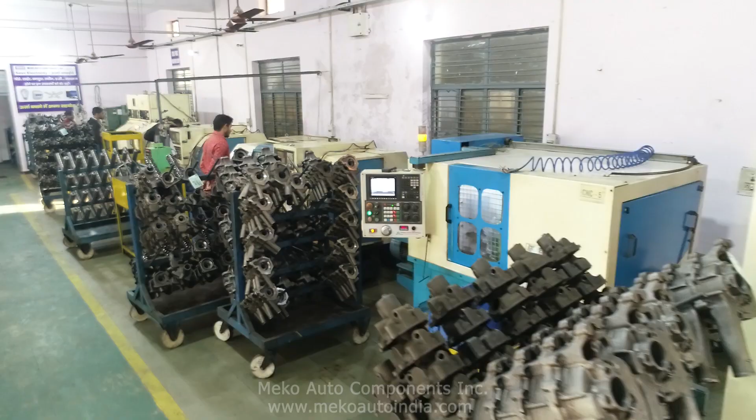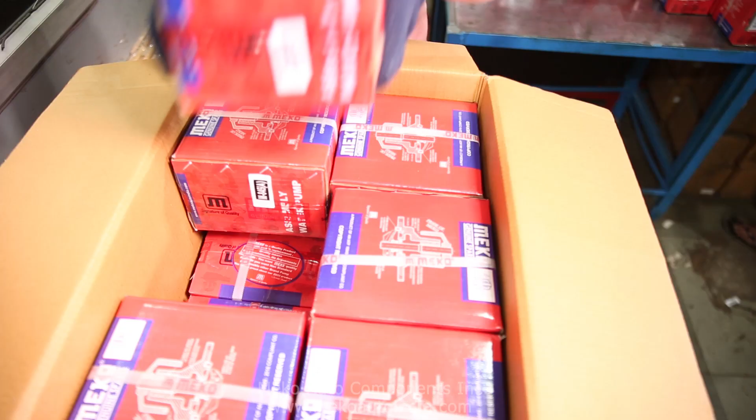With a production capacity of 30,000 pumps a month, we manufacture, supply and export around 300 variants of automotive water pump assemblies, kits and spares for all kinds of vehicles such as heavy commercial vehicles, light commercial vehicles, earth movers, stationary engines, jeeps, cars and tractors for both Indian and overseas markets such as Sri Lanka, Bangladesh, South Africa, USA, UK, Germany, Belgium, Netherlands, Poland, Australia, etc. through an extensive global network of around 300 distributors, our trustworthy and reliable business partners.

We are currently supplying to OEMs such as Field Marshal, PM Diesel Private Limited and Marshall Motors, Sonalika Tractors, Captain Tractors Private Limited, Adico Escorts Agri Equipments Private Limited and Ace Crane. And our prospective esteemed customers are JBM Group, GMB USA, Agco International GmbH, etc.

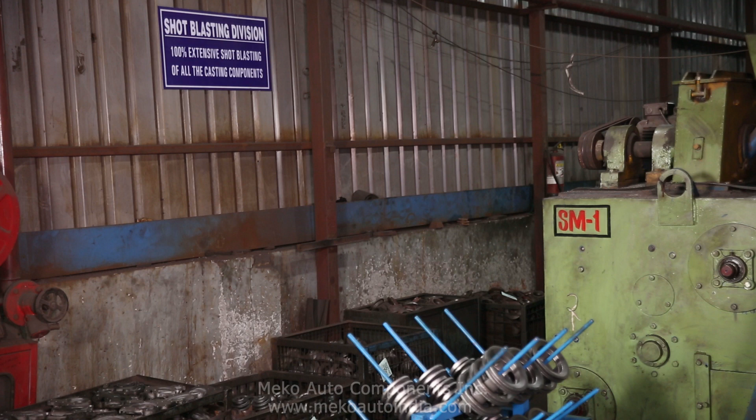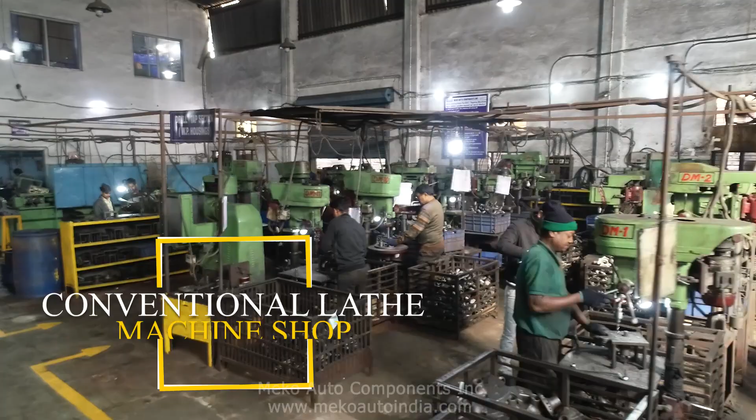After the initial process of grinding and fettling, all the casting components are extensively shot blasted before they are delivered to the conventional lathe machine shop, equipped with calibrated gauges and fixtures for controlled and accurate proof machining by highly skilled and experienced machine operators.

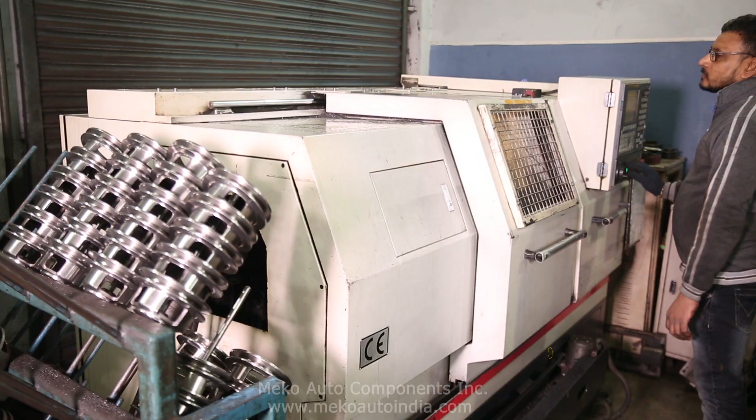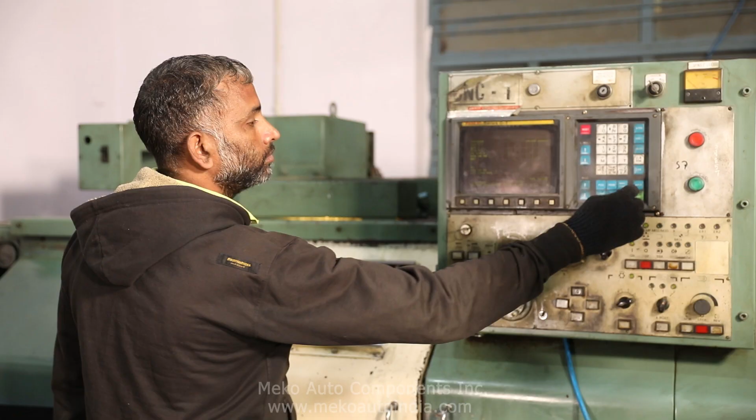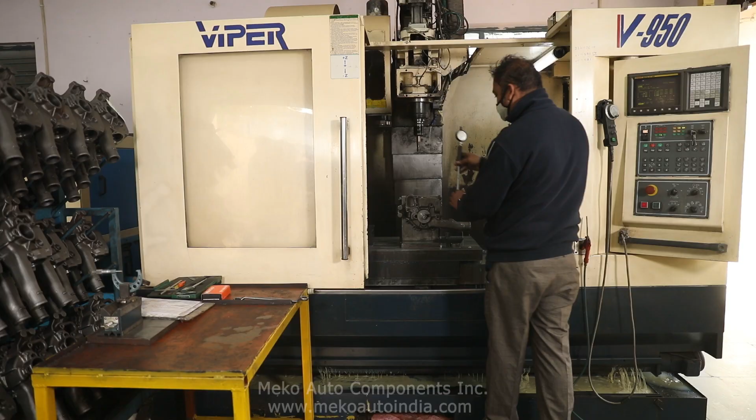All the proof machined casting components are precision machined in our state-of-the-art CNC or VMC machine shop, equipped with all the standard inspection instruments, gauges and fixtures under the supervision of qualified and trained quality inspectors. We also have an in-house injection molding setup for the production of high-performance industrial plastic PPS impellers.

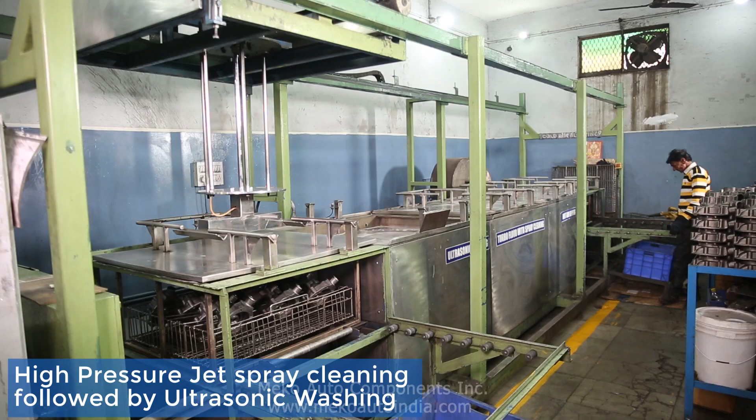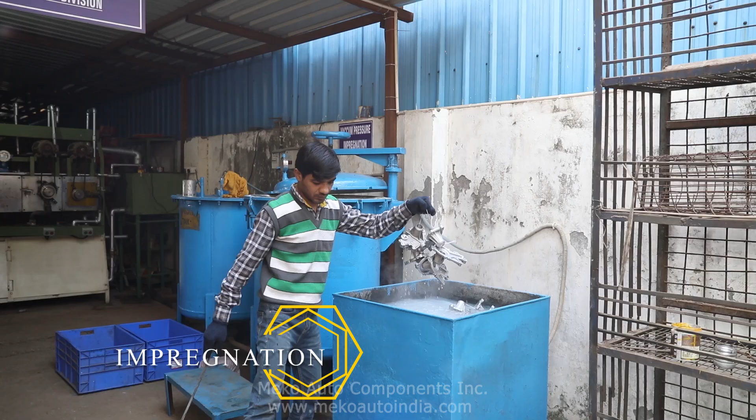For a thorough and complete removal of the tenacious contaminants and dust particles, all the final machined components are comprehensively cleaned and washed in the in-house automated multi-stage ultrasonic cleaning system before they are forwarded to the assembling shop. All the aluminum machined housings are impregnated as per set standards. Apart from this, our important components are procured from some of the top OEM suppliers and certified vendors.

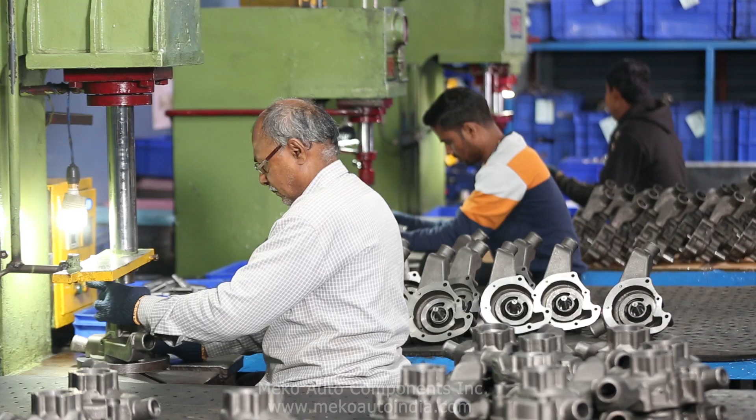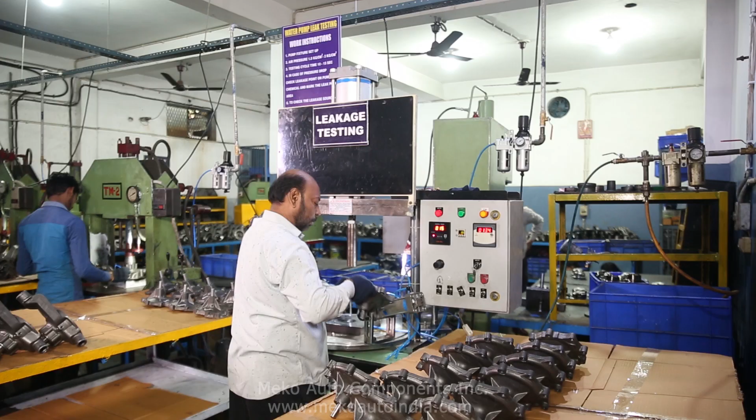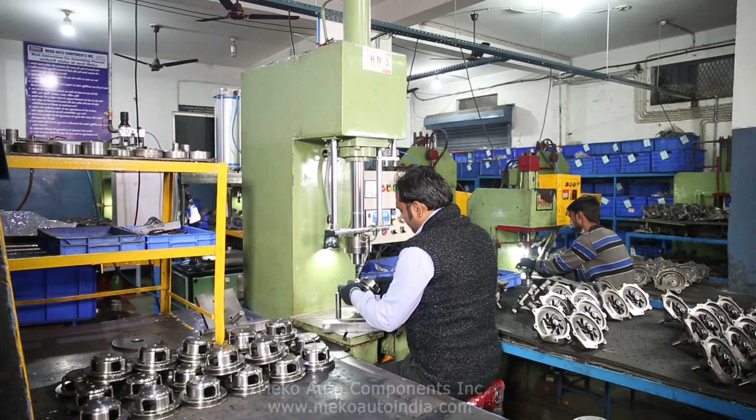Our water pump assembly shop is equipped with modern hydraulic presses with load cells for accurate and controlled water pump assembling with the aid of calibrated assembling fixtures and gauges. All the water pump housings semi-assembled with bearing and mechanical seal are leak tested on special purpose testing machines using pneumatic pressure decay method and bubble immersion method with the aid of test fixtures at standard air pressure. All the mechanical seals are also leak tested using the same process at the pre-assembly stage.

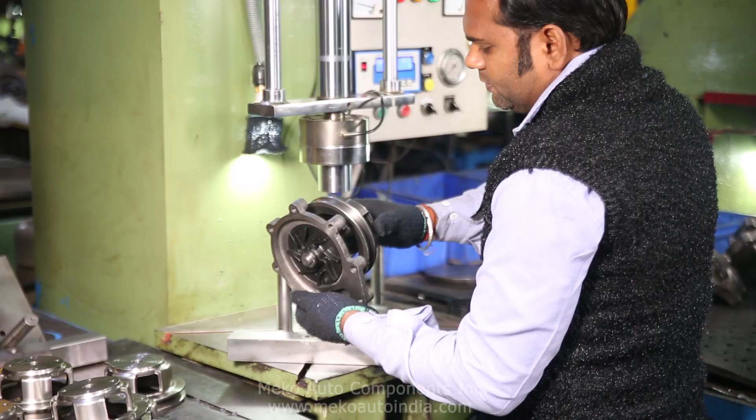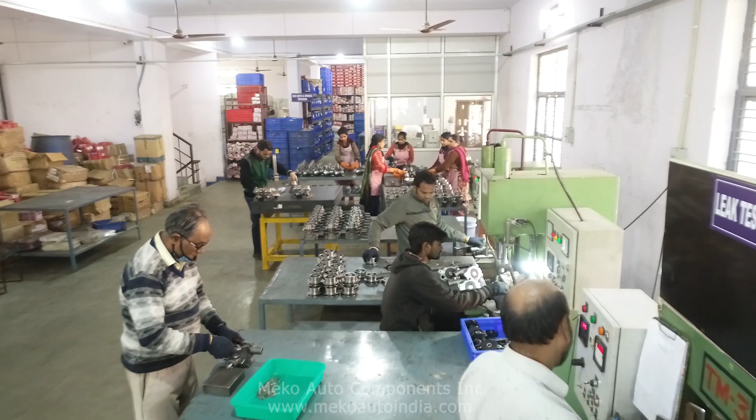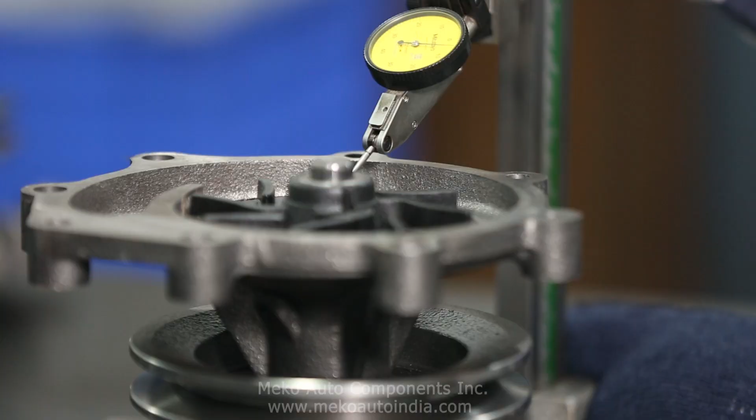Various kinds of high-quality Japanese anaerobic sealants are applied on the mating parts while assembling. Every pump is assembled as per original drawings or samples and customer specifications. Our quality management system complies with all the requirements of ISO 9001:2015 and ISO 45001:2018 with quality control inspections within and between all the working departments.

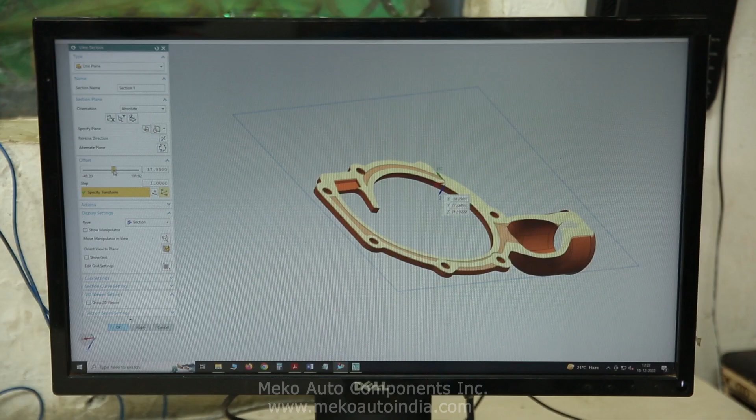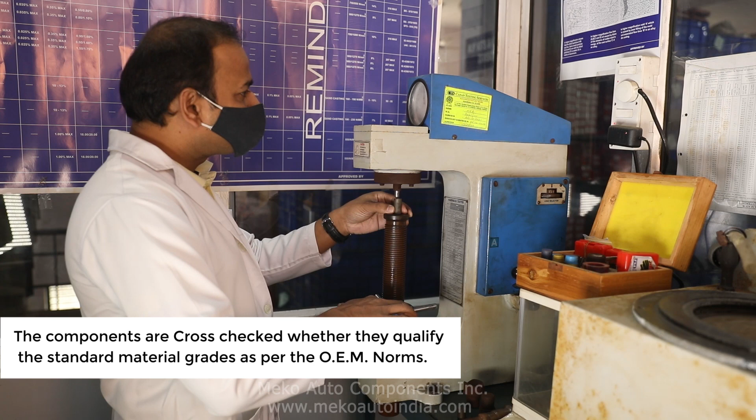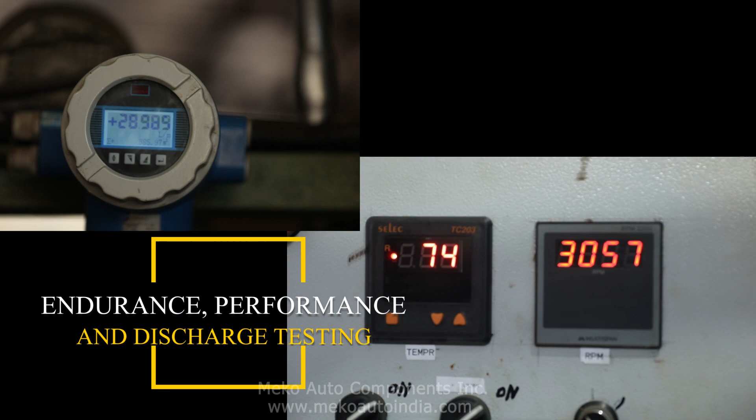Using cutting-edge 3D software, our skillful and experienced designers create unique designs and models for development of perfect dies and patterns for the components of every new water pump variant. Precise metallurgical testing of all kinds of raw materials is regularly done for composition, structure, strength, and hardness. Critical endurance and performance testing is regularly carried out for various water pump assemblies on the modern test rig to meet the discharge or LPM requirements of our esteemed OEM customers.

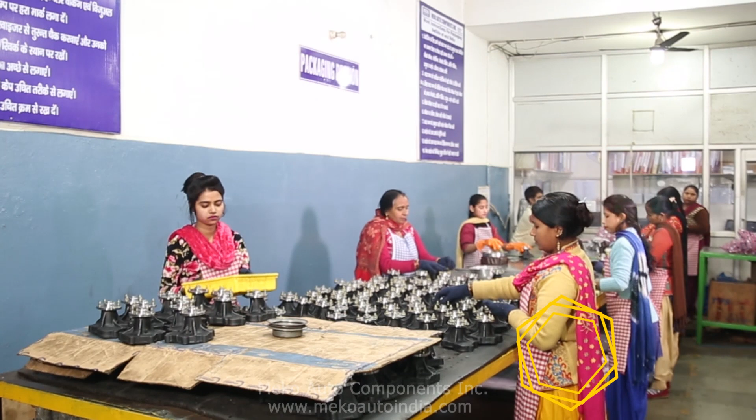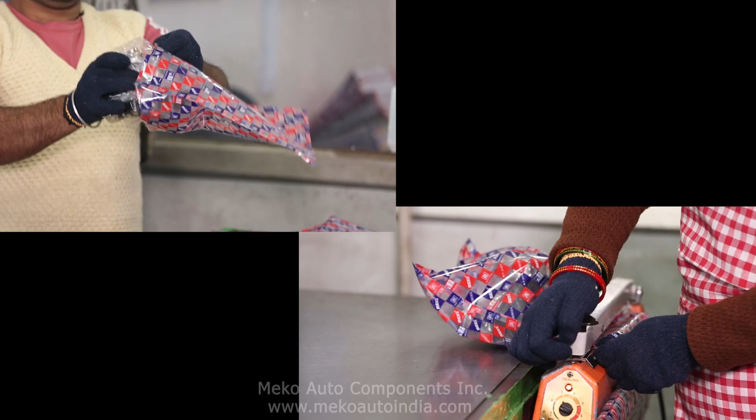The water pump assemblies are thoroughly cleaned, applied with rust-preventive oil, sealed into anti-rust VCI film, packed in corrugated boxes and strapped for complete protection against moisture during storage and transportation.

Meko Auto is driven by excellence and always striving to exceed customer expectations in both quality and service. It is our sheer dedication that helped us win the trust of millions of our customers across the country and abroad and pushes us to evolve newer variants and achieve perfection in customized product design, a forte that distinguishes us from the competition.